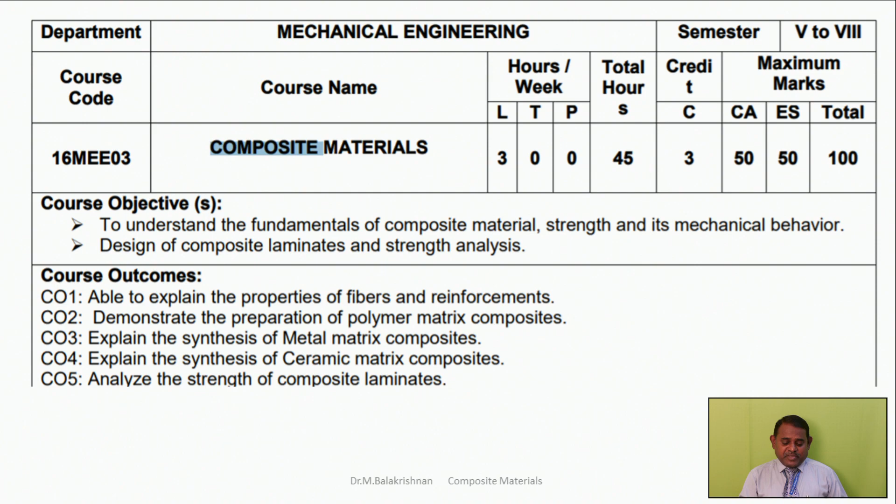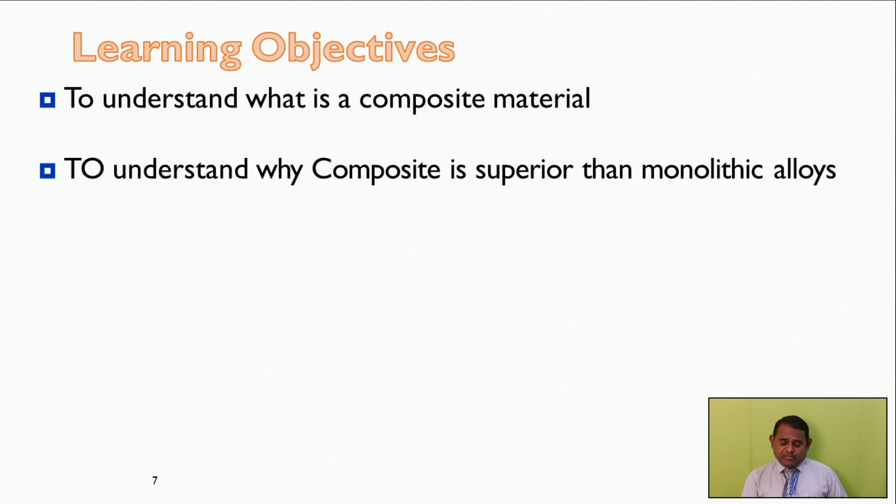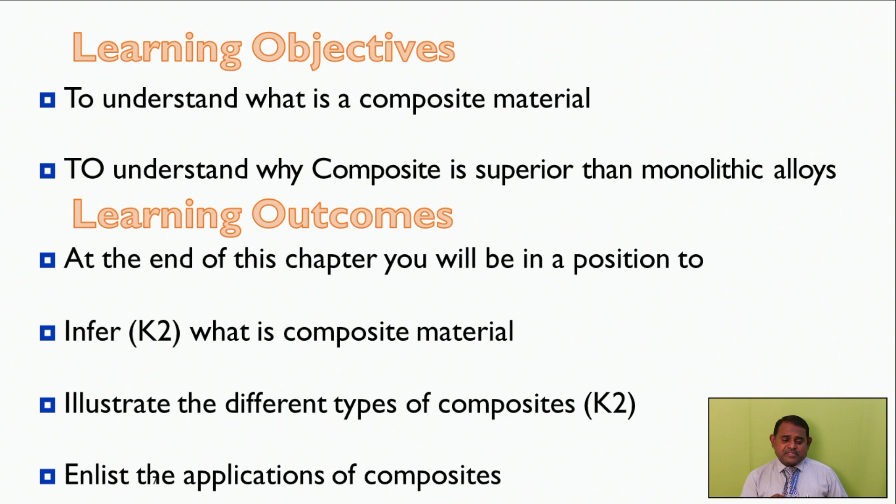Course outcomes related to this subject: you can be in a position to explain the properties of fibers and reinforcement. With this course outcome, we are going to discuss various learning objectives to understand what a composite material is, and why composite is superior to monolithic alloys. At the end of this session, you will be in a position to infer what a composite material is, illustrate the different types of composites, and enlist the various applications of composites.

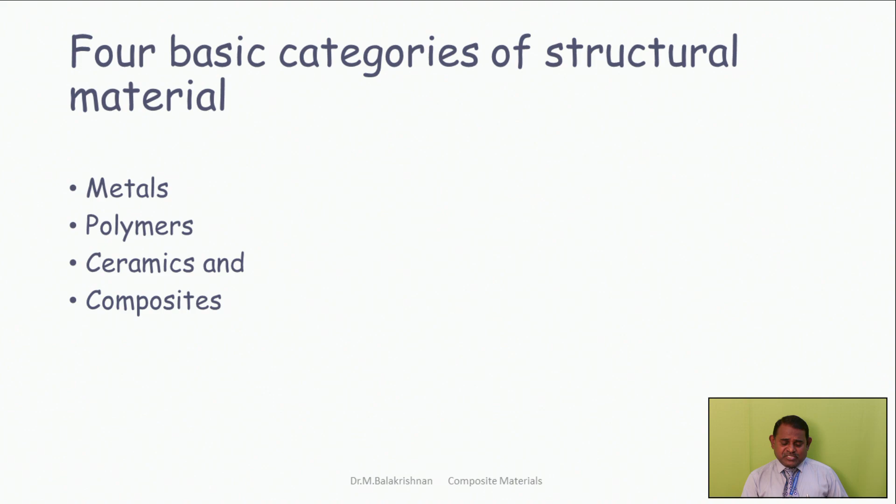You can come across many materials related to metals, polymers, ceramics and composites - these are the common four basic categories of structural material.

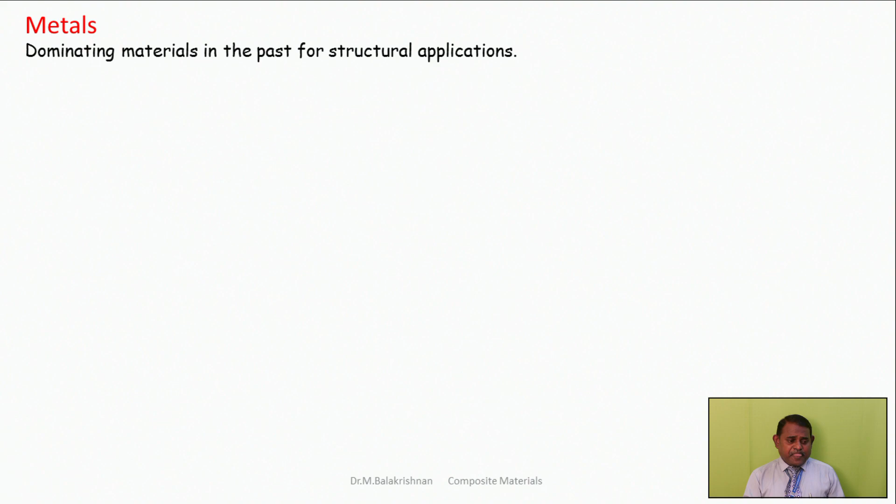Metals are dominating materials for the past centuries because of many advantages, and common materials are aluminum, copper, magnesium, zinc, lead, nickel and titanium. In structural applications, alloys are more frequently used than pure metals because of advantages like high strength, corrosion resistance, wear resistance, and good toughness achieved when added with specific alloying elements. Because of these reasons, alloys are used.

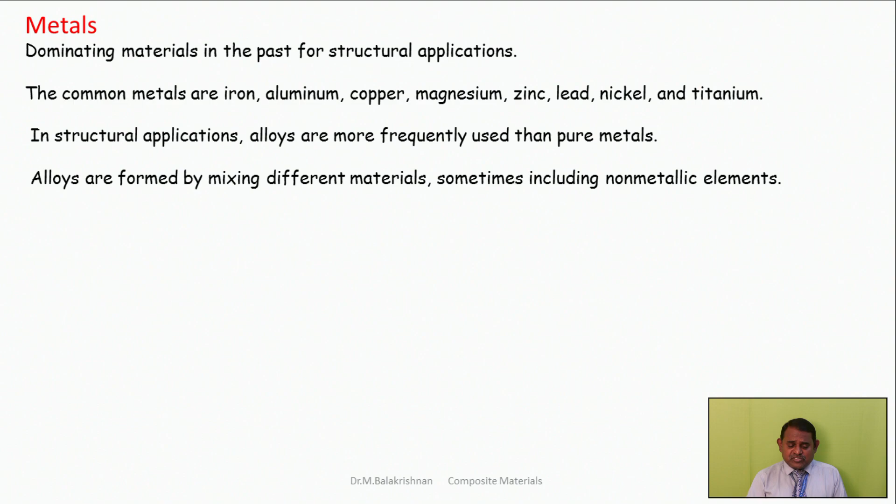Alloys are formed by mixing different materials, sometimes including non-metallic materials too, and they offer better properties than pure metals. For example, cast iron is brittle and easy to corrode, but the addition of less than 1% carbon in iron makes it much tougher, and the addition of chromium makes it very corrosion resistive.

Following the principle of alloying, thousands of metals or alloys are created because of the many possible alloying elements that can be added to metals. Metals are in general heavy compared to plastics and composites.

Only aluminum, magnesium, and beryllium provide densities closer to plastics. But steel is 4 to 7 times heavier than plastic materials, and aluminum is 1.2 to 2 times heavier than plastics. Steel is about 7.8 grams per cc, while aluminum is 2.7 grams per cc, so you can see a clear comparison between aluminum and steel.

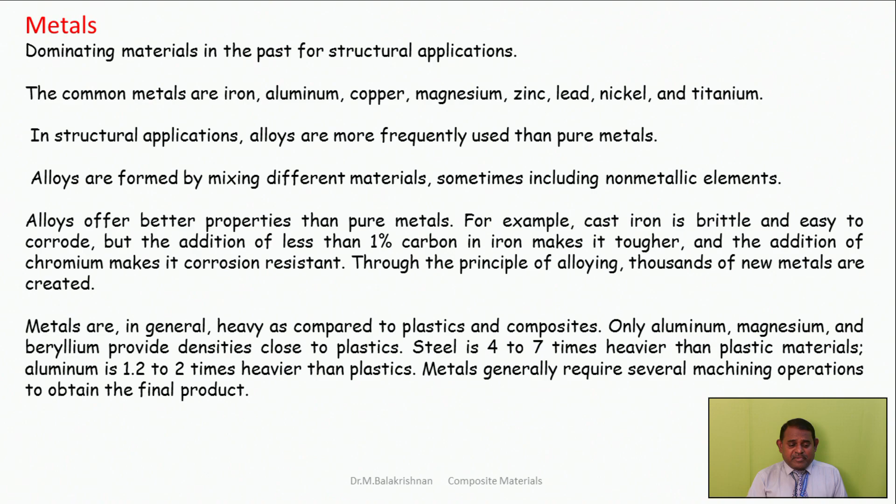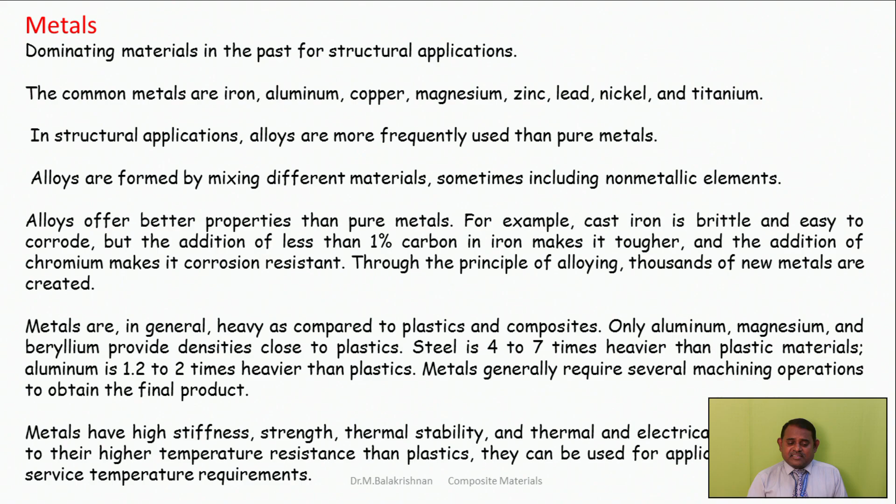Metals generally require several machining operations to obtain the final products. Metals have high stiffness, strength, thermal stability, and thermal and electrical conductivity. Due to their high temperature resistance compared to plastic, they can be used for applications with higher service temperature requirements.

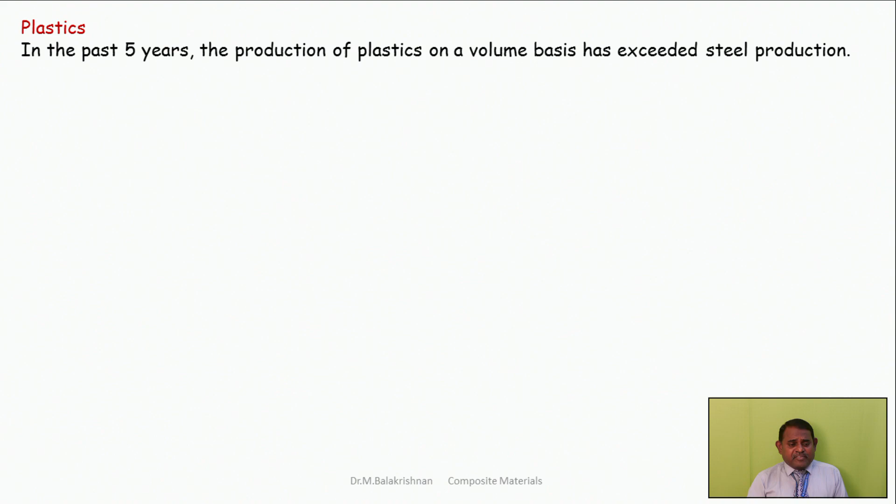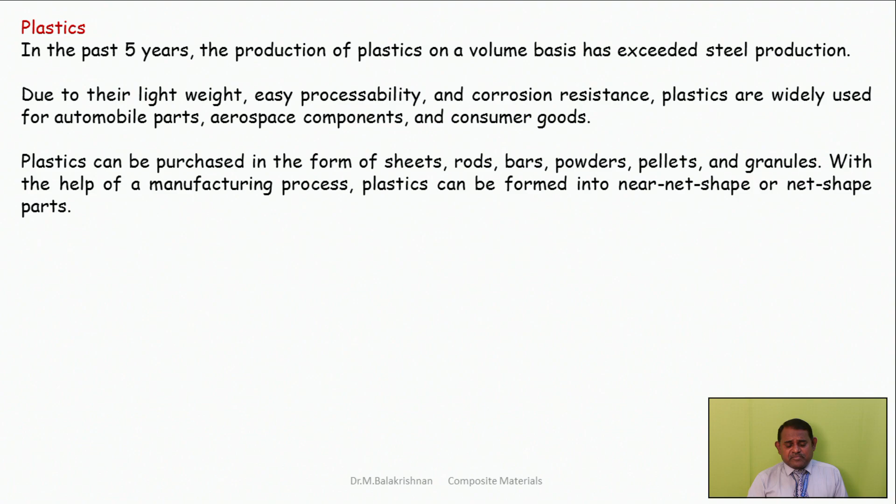Plastics have been picked up over the past 5 to 10 years due to their lightweight, easy processability, and corrosion resistance, and plastics are widely used for automobile parts, aerospace components, and consumer goods. Plastics can be purchased in the forms of sheet, rod, bar, powders, pellets and granules. With the help of manufacturing processes, plastics can be formed into near net shape or net shape parts, providing high surface finish and therefore eliminating several machining operations. This feature enables low cost production.

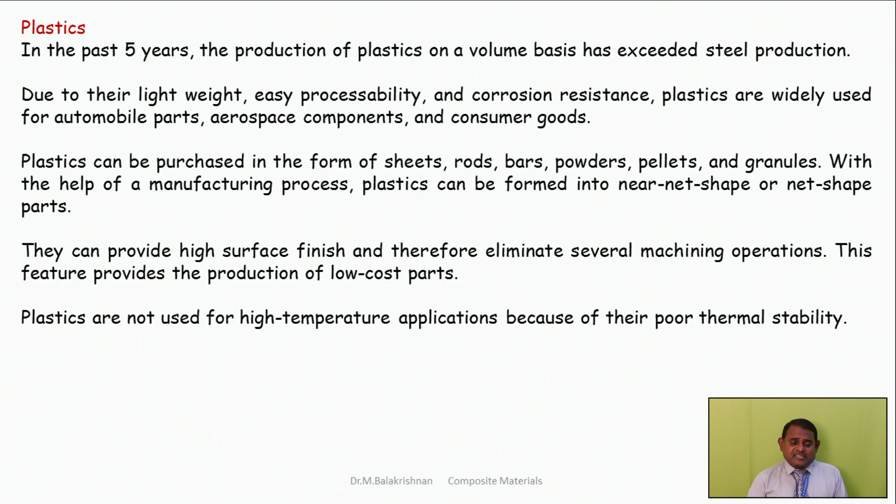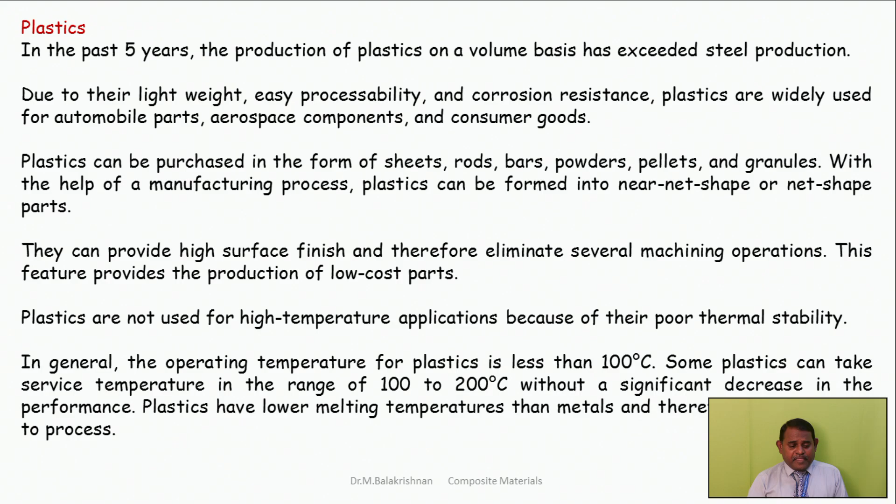Plastics are not used for high temperature applications because of their poor thermal stability - yes, it is very weak. In general, the operating temperature for plastics is less than 100 degrees Celsius, which is another disadvantage. Some plastics can take service temperatures in the range of 100 to 200 degrees Celsius without significant decrease in performance. Plastics have lower melting temperatures than metals, and therefore they are easy to process.

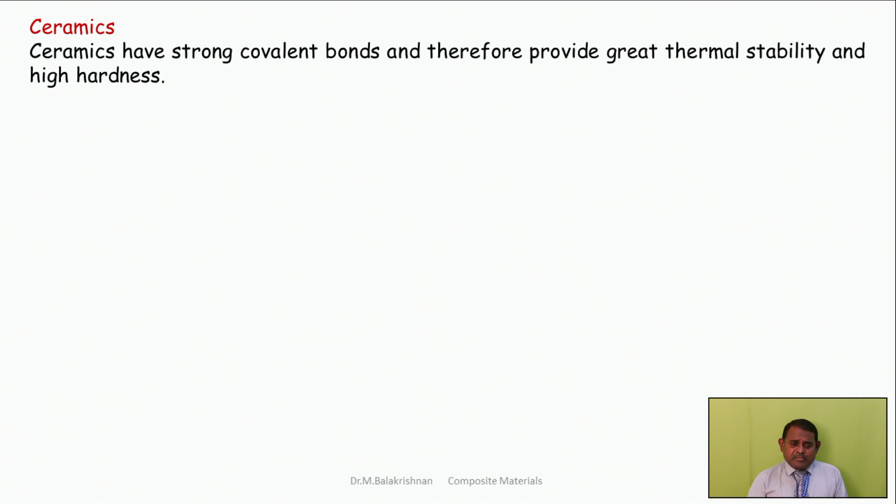The third material category is ceramics, which have strong covalent bonds and therefore provide great thermal stability and high hardness.

Ceramics are the most rigid of all the materials we have discussed, including steel and plastic. The major distinguishing characteristic of ceramics compared to metals is that they possess almost no ductility, because of their high hardness they possess zero or minimum ductility, and they can fail in brittle fashion.

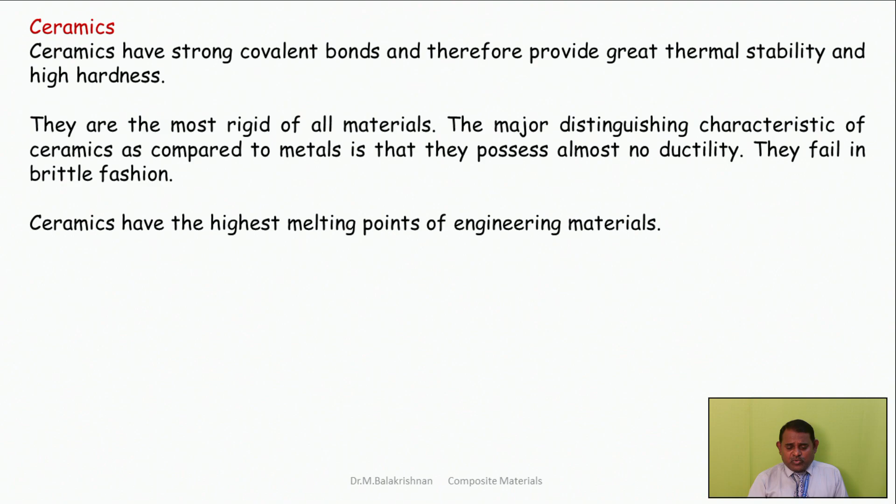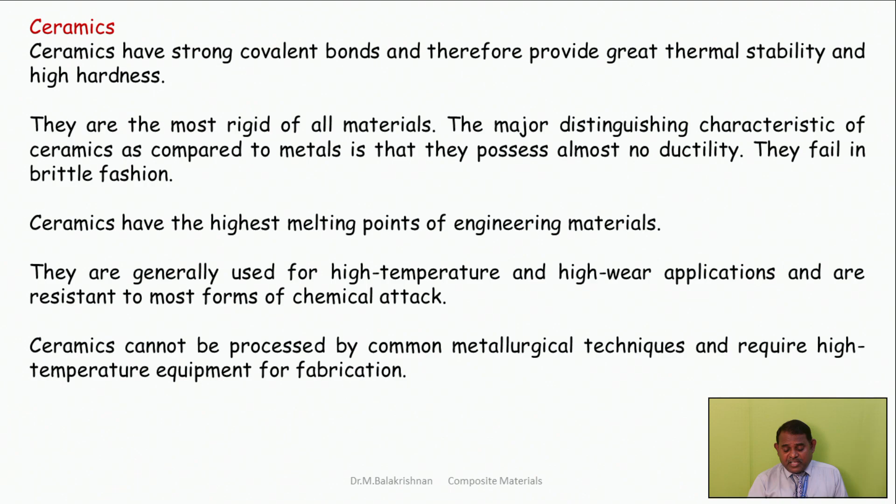Ceramics cannot be processed by common metallurgical techniques and require high temperature equipment for fabrication. Due to their high hardness, ceramics are difficult to machine and therefore require net shape forming for final shape production. They also require expensive cutting tools such as carbide or diamond tools.

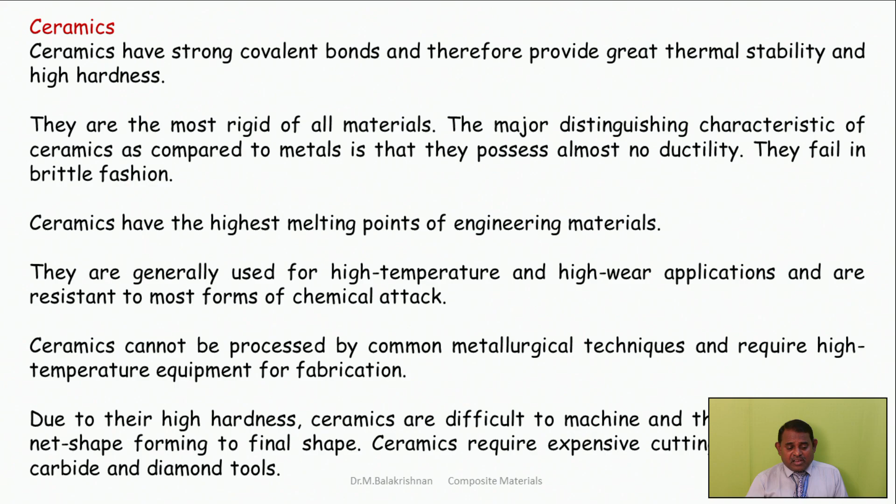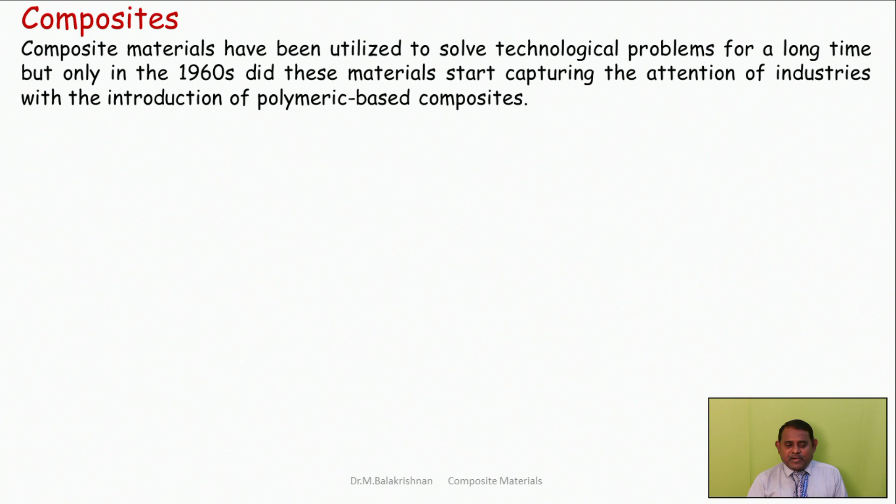The fourth category of material is composites. Composite materials have been utilized to solve technological problems for a long time, but only in the 1960s did these materials start capturing attention in industries with the introduction of polymeric based composites. Since then, composite materials have become common engineering materials, designed and manufactured for various applications including automotive components, sporting goods, aerospace parts, consumer goods, and the marine and oil industries.

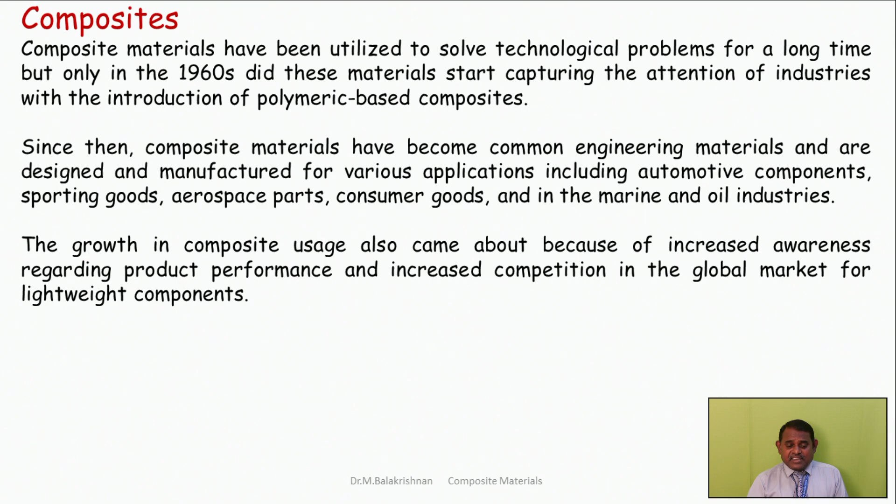The growth in composite usage also came about because of increased awareness regarding product performance and increased competition in the global market for lightweight components.

Among all materials, composites have the potential to replace widely used steel and aluminium, many times with better performance. Replacing steel components with composite components can save 60 to 80% of the component weight, and 20 to 50% of the weight by replacing aluminium parts. Today it appears that composites are the material of choice for many engineering applications.

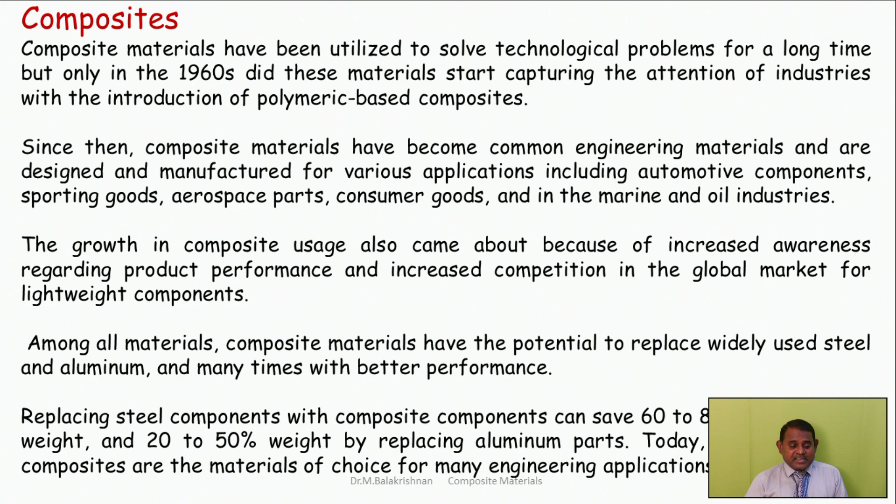As discussed previously, the density of steel is around 7.8 grams per cc, while the density of composites can start lower, for example aluminum composite can be comparable with 2.4 grams per cc, and it can increase with the addition of the fraction of reinforcements.

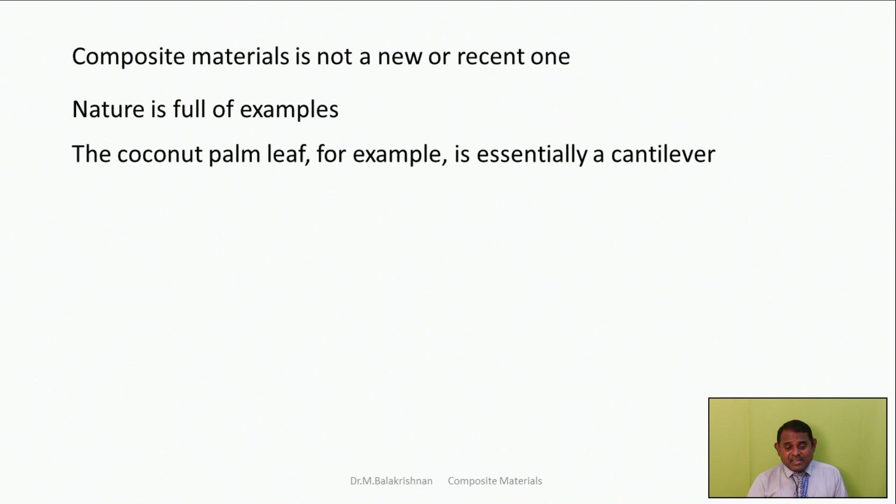Composite material is not new or recent, because nature is full of examples of composites. For example, the coconut palm leaf is essentially a cantilever beam, and it is a fibrous composite, with cellulose fiber in a lignin matrix. The cellulose fibers have high tensile strength but are very flexible, that is low stiffness, while the lignin matrix joins the fibers and furnishes the stiffness. So the combined properties are obtainable by using the combined effect of the cellulose and lignin matrix.

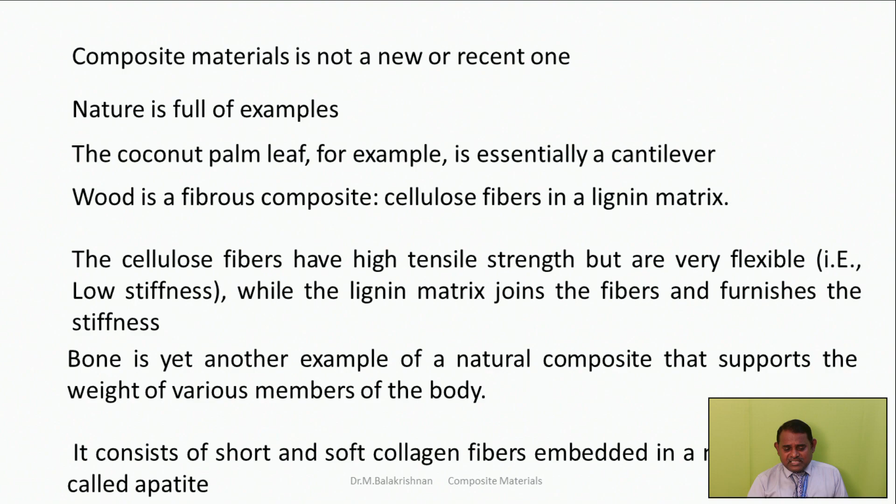Bone is another example of a natural composite that supports the weight of various members of the body. It consists of short and soft collagen fibers embedded in a mineral matrix called apatite.

Nevertheless, one can safely mark the origin of the distinct discipline of composite materials as the beginning of the 1960s. As discussed previously, composites are not new, and may have existed since the evolution of the earth, but the application of composite materials to the engineering industry started picking up from the 1960s.

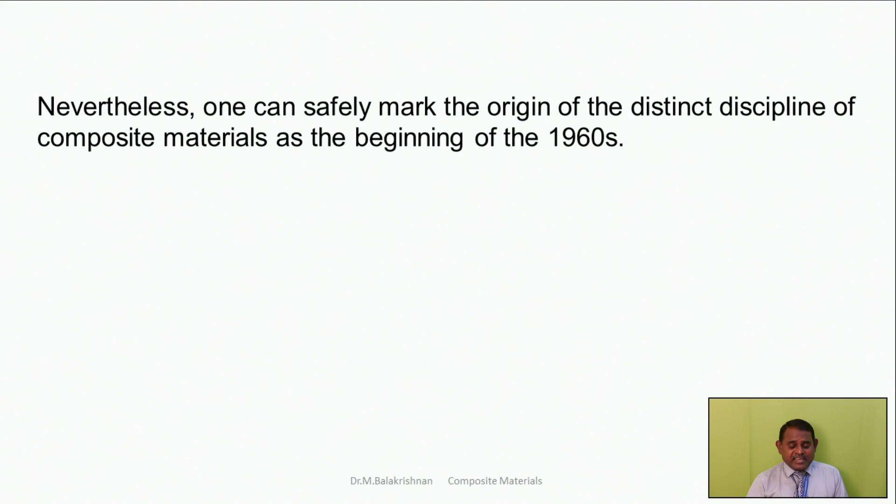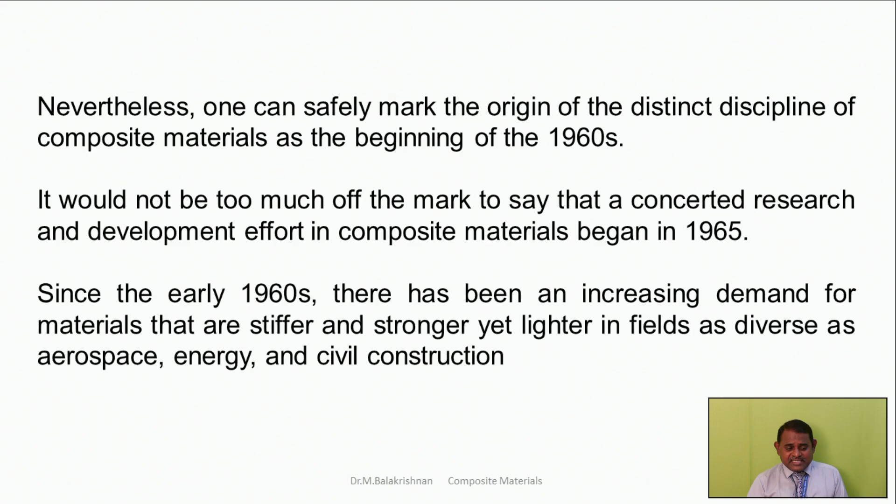That is why it is claimed that composite science and its application started from the 1960s, and it would not be too much to say that concerted research and development effort in composite materials began in 1965. Since the early 1960s, there has been increasing demand for materials that are stiffer and stronger, yet lighter, in fields as diverse as aerospace, energy, and civil construction.

As you know from the materials perspective, we have more than 50,000 engineering materials. Maybe some may not find a real application yet, but if you take into consideration the full list of engineering materials, it can cross more than 50,000.

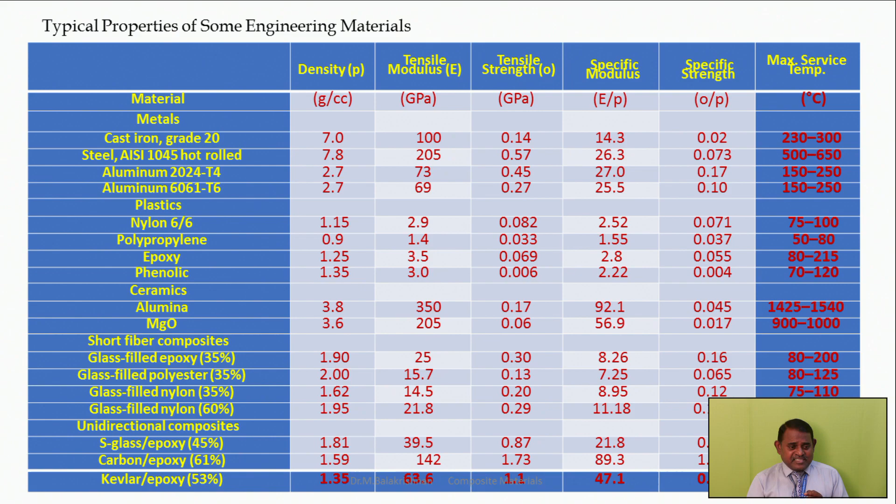Now, what is composite? We have been discussing various material categories, starting from metal, plastics, ceramics and composite. So what is a composite specifically? It consists of two or more physically distinct phases, that is matrix and reinforcement, with an interface separating them.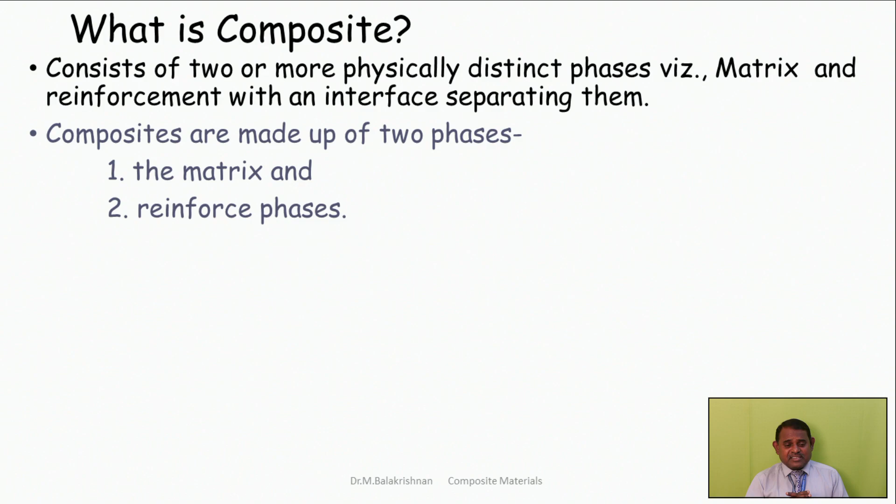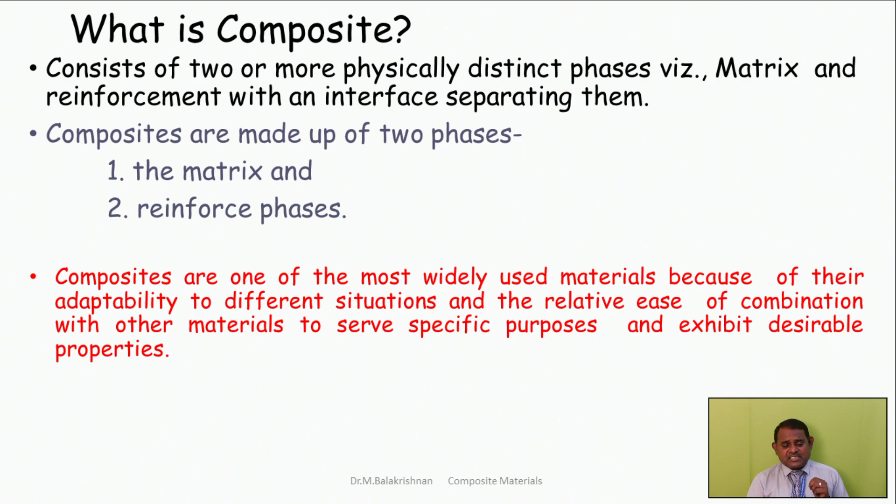Composites are made up of two phases, the matrix and reinforcement phase, and there will be a separating phase called the interface. Composites are one of the most widely used materials because of their adaptability to different situations and the relative ease of combination with other materials to serve specific purposes and exhibit desirable properties.

The main advantage of composite materials is their high strength and stiffness combined with low density when compared with bulk materials. So we should think about the density and specific strength. The strength-to-weight ratio and stiffness-to-weight ratio plays a vital role when we choose a material for high mobility, for example automobile applications, which require high strength with light weight.

So in this case, composite material will be a suitable solution for giving a perfect combination of high strength and light weight. For example, if you look for high strength of about 750 megapascal, then you should go with steel and its alloys only. But another material can solve this problem, because if you look at steel, you should think about its density, which crosses about 7.8 grams per cc.

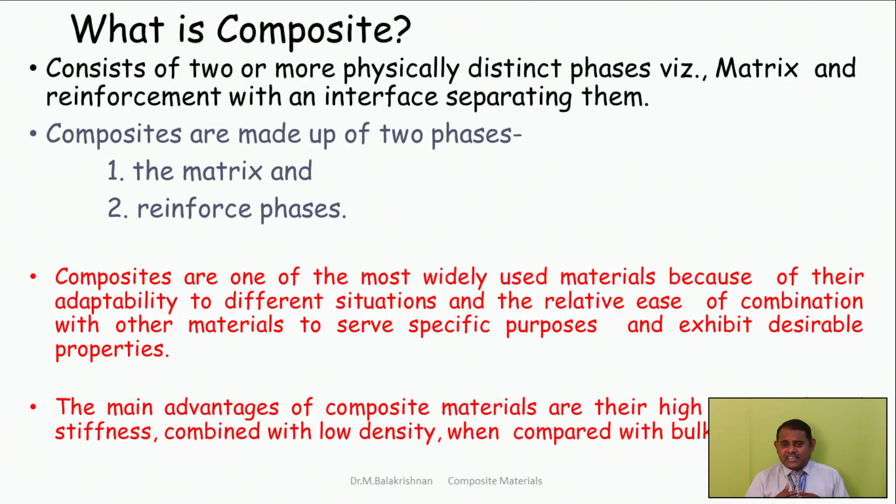But the same strength can be easily achievable by the application of composite materials, like aluminum alloy composite, when it is added with silicon carbide particles. It can give 650 to 700 megapascal strength for pure aluminum alloy even, giving one-third of the density and weight while still achieving high strength. That is the beauty of selecting composite materials.

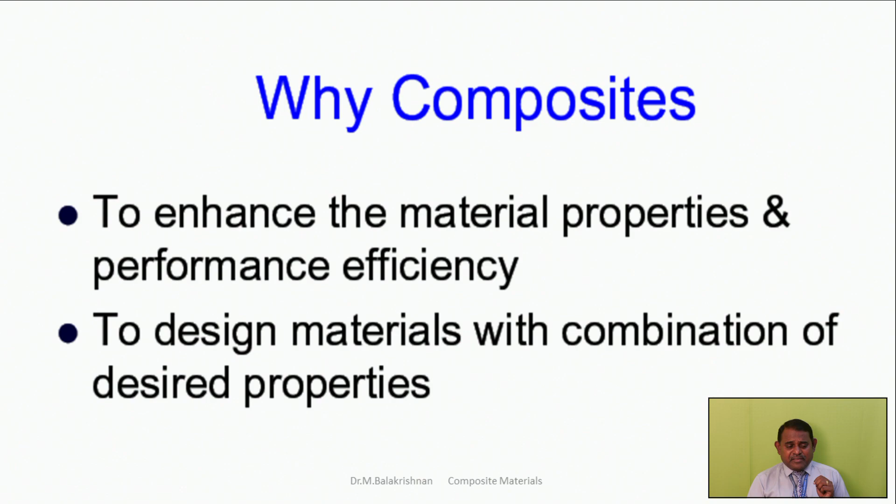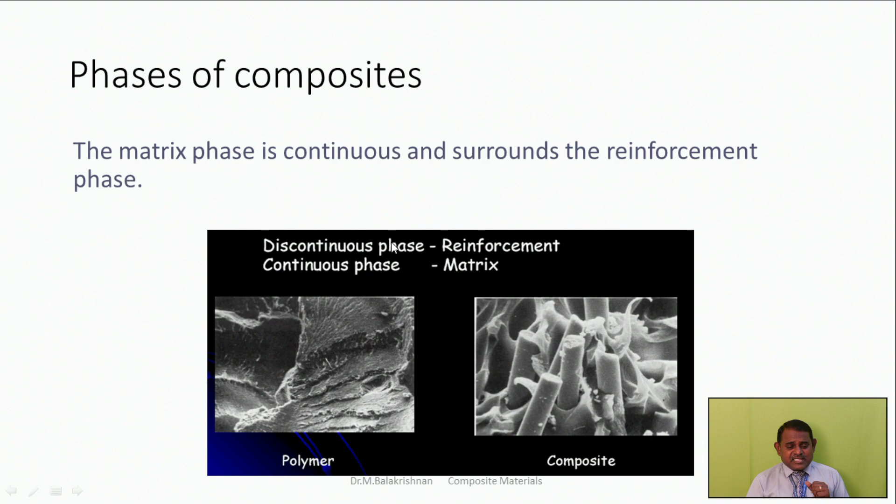To enhance material properties, performance efficiency is the primary reason why people are really inclined towards composite manufacturing, as it gives a chance to design materials with a combination of desired properties. In the phases of a composite, the matrix phase is a continuous phase which surrounds the reinforcement phase. From this diagram, we can understand that the discontinuous phase is the reinforcement, and the continuous phase is the matrix.

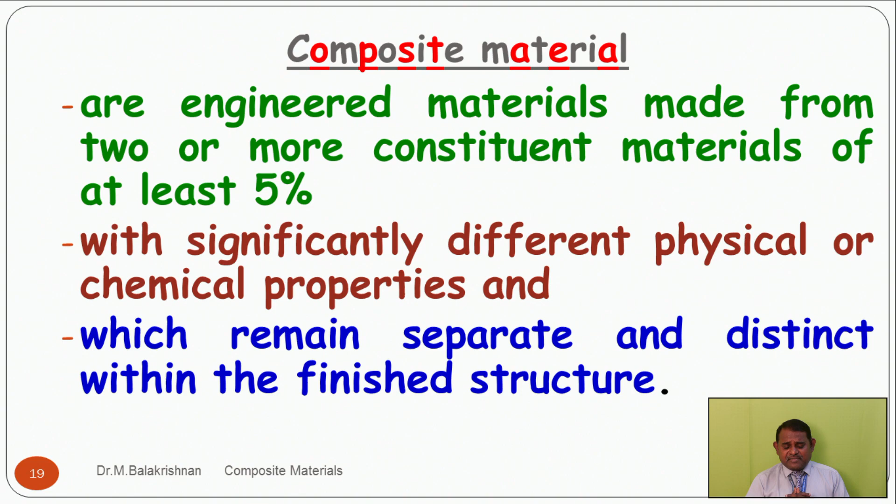Composites are engineered materials made from 2 or more constituent materials, each at least 5%, with significantly different physical or chemical properties. It's very important to understand that the 2 phases we discussed are the reinforcement and matrix phase. Both of these materials have different physical and chemical properties and remain separate and distinct within the finished structure.

In this context, we should also think about alloys. Alloys are made with 2 or more different constituent elements, and similarly composites are also made with 2 or more different elements. So what is the difference between composite and alloy? An alloy is made as a homogeneous mixture, that is, alloys are available in solid solutions or other ways in precipitates, but composites remain separate even when they are made.

For example, the reinforcement phase will be reinforcement phase and the matrix phase will be matrix phase. You can easily distinguish which is matrix and which is reinforcement after manufacturing of the composite, even through the naked eye. For example, in bamboo leaf or bone, which we talked about earlier, and banana leaf or other composite materials, you can distinguish what is reinforcement and what is matrix. But in alloys, it is not possible to distinguish with the naked eye or even under a microscope which is a solvent atom and which is a solute atom.

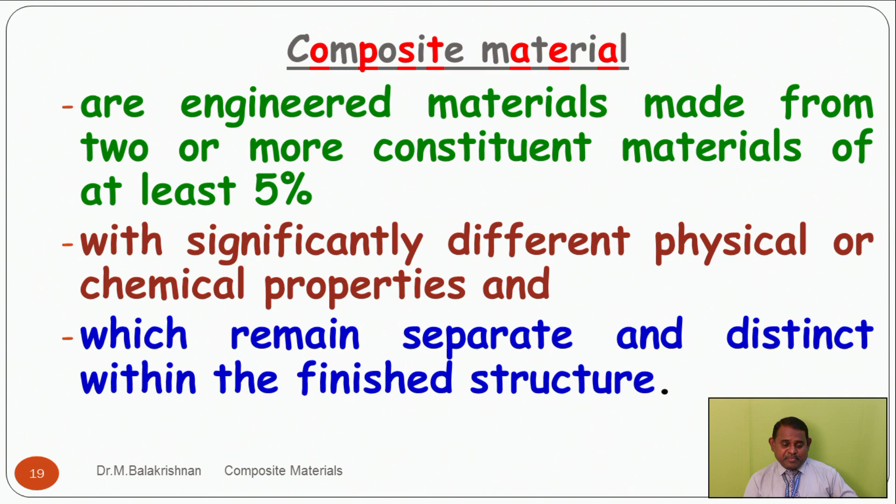So what is an alloying element? It is not possible to distinguish after the making of an alloy. So that is the difference between alloy and composite. In composite, the reinforcement phase and matrix phase remain separate and distinct within the finished structure. But in alloys, it does not remain separate, it is mixed as a solid solution or precipitate.

Why are composites important? Because composites can be very strong, very stiff, and very light in weight. So strength-to-weight ratio and stiffness-to-weight ratio that are easily achievable can be greater than steel or aluminum. The same stiffness can be achieved with lightweight - that is the beauty of composites.

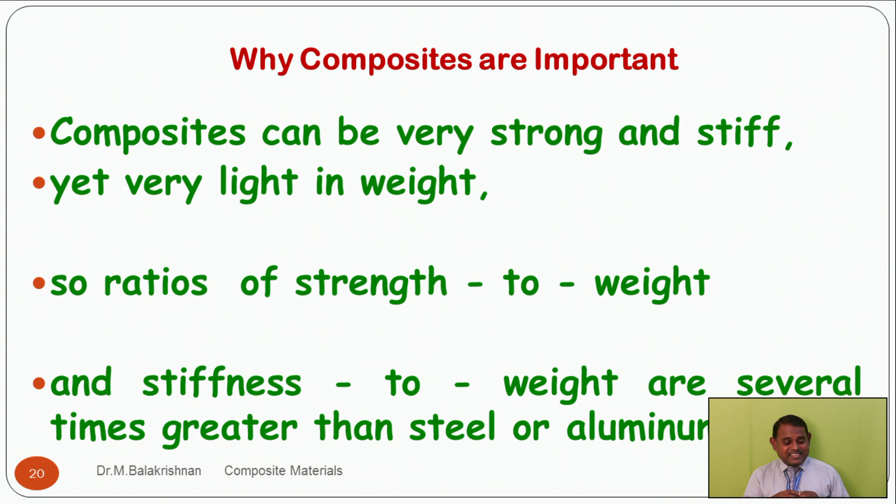In addition, fatigue properties are generally better than common engineering metals, which is another advantage of composites, and toughness is often greater too. Composites can be designed so they do not corrode like steel. If you want to make steel a non-corrosive material, you should add costly alloying elements like chromium or nickel to make the steel stainless. But in composite, this can be easily achieved without much addition of alloying elements.

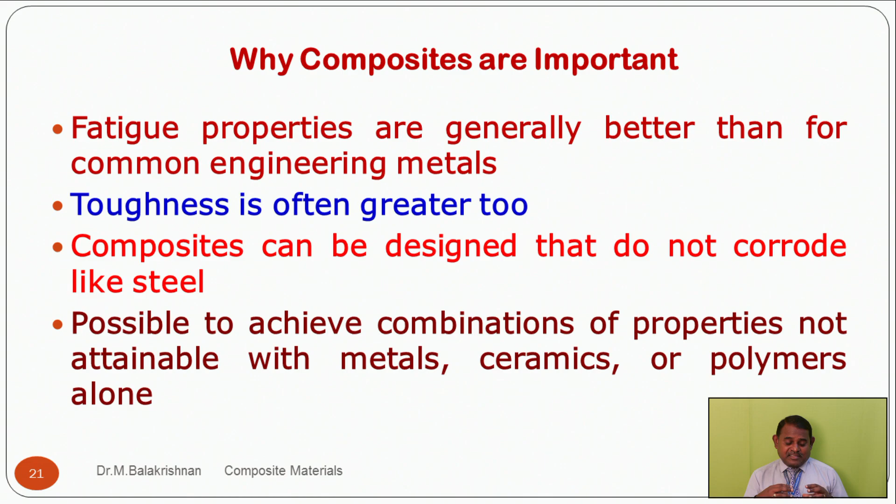It is possible to achieve a combination of properties that cannot be achieved in metals, ceramics, or polymers alone. When used alone, it is not possible to achieve this kind of combination of properties, but when combined with a matrix to form a composite material, it becomes possible to achieve this combination of properties.

But you cannot claim that composites always have an advantage and huge potential for large applications - it's not like that. Composites also have some disadvantages. Properties of many important composites are anisotropic - this is a point to seriously think about. It offers different properties with respect to different loading directions, so you have to think very carefully when choosing a composite material for your application.

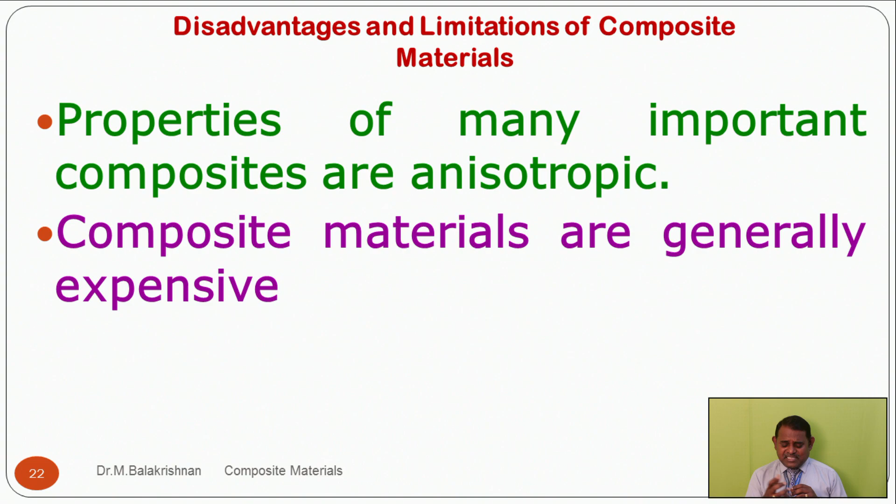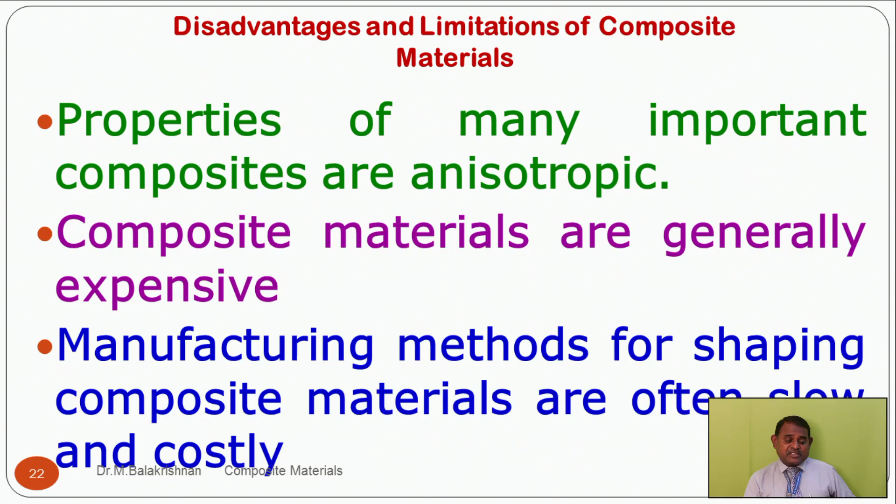And composites are generally expensive, whether in the way of matrix selection or reinforcement selection. Again, the third important disadvantage of composite material is that manufacturing methods for shaping composite materials are often slow, and it is costly.

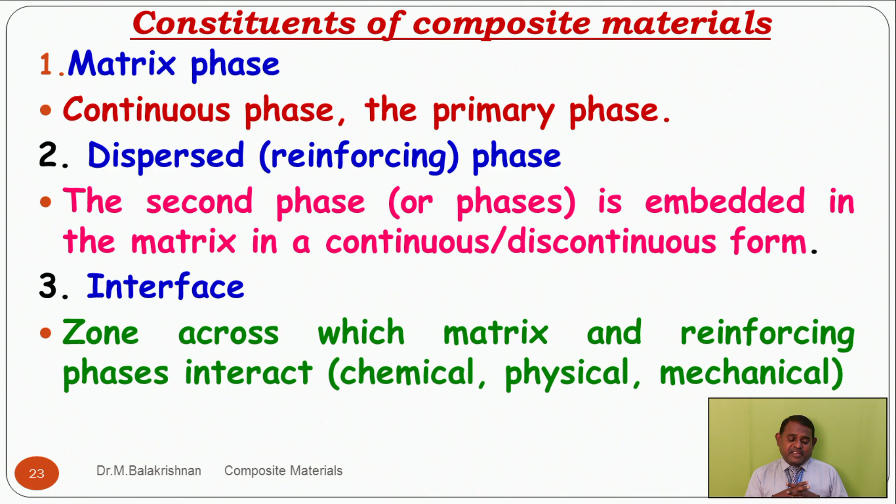Coming to the constituents of composite material, as we discussed in the previous slides, the matrix phase is a continuous phase and it is the primary phase. The dispersed or reinforcement phase is called the secondary phase, and it is embedded in the matrix in a continuous or discontinuous form. The third one is the interface - it is the zone across which the matrix and reinforcement phase interact chemically, physically, and mechanically.

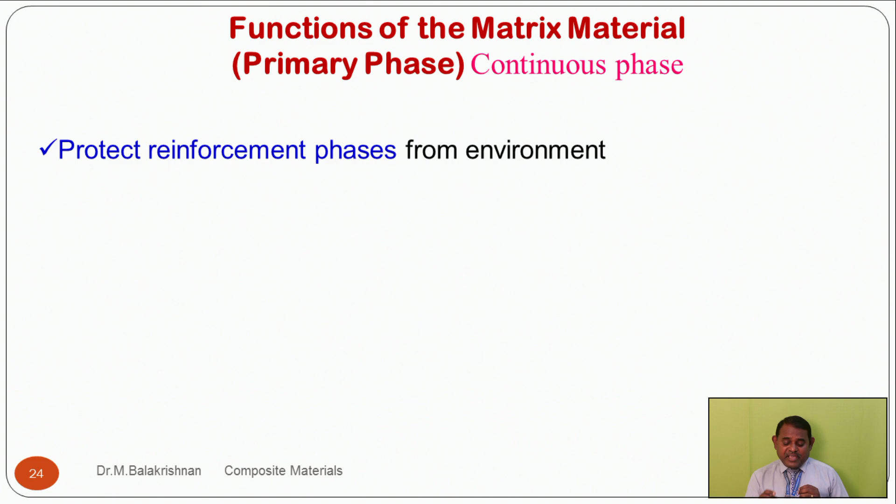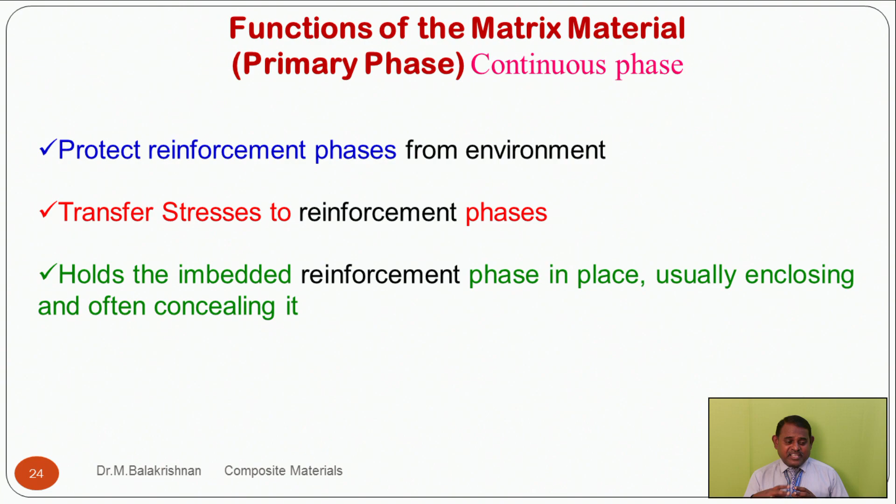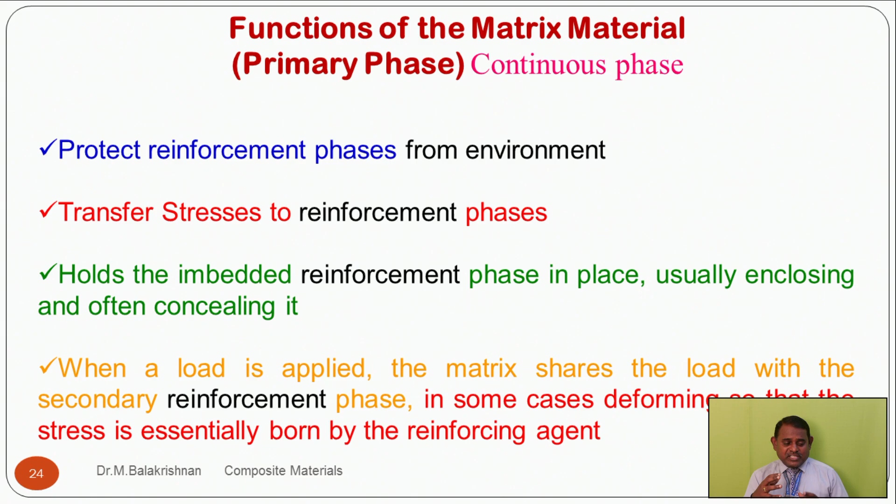So functions of the matrix material, primary phase or continuous phase: it protects the environment, it protects the reinforcement phase from the environment, and it transfers the stresses to the reinforcement phase, and it holds the embedded reinforcement phase in place, usually enclosing and often concealing it. When a load is applied, the matrix shares the load with the secondary reinforcement phase. In some cases, it deforms so that the stress is essentially borne by the reinforcement agent.

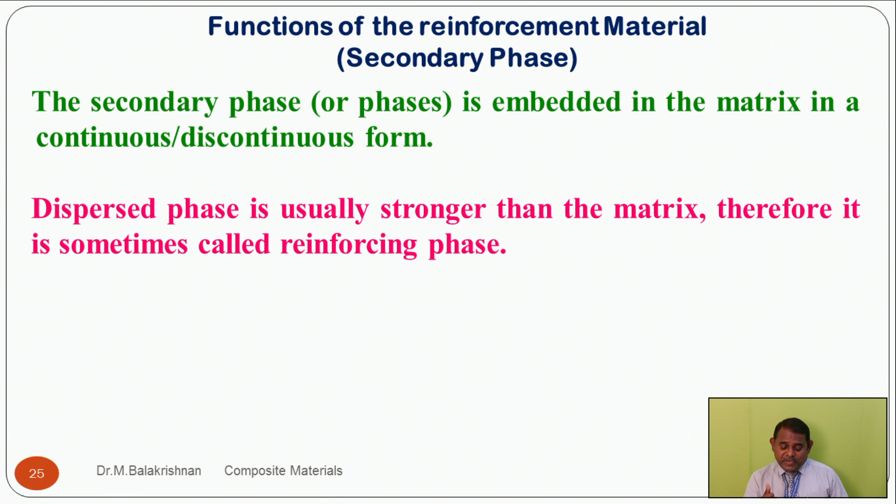Functions of the secondary phase, that is reinforcement: the secondary phase is embedded in the matrix, in the primary phase, and may be continuous or discontinuous, depending upon the type of reinforcement we select. The dispersed phase is usually stronger than the matrix, therefore it is called the reinforcement phase. The reinforcement imparts special physical, mechanical, and electrical properties to enhance the matrix properties, and the material properties are a combination of these two.

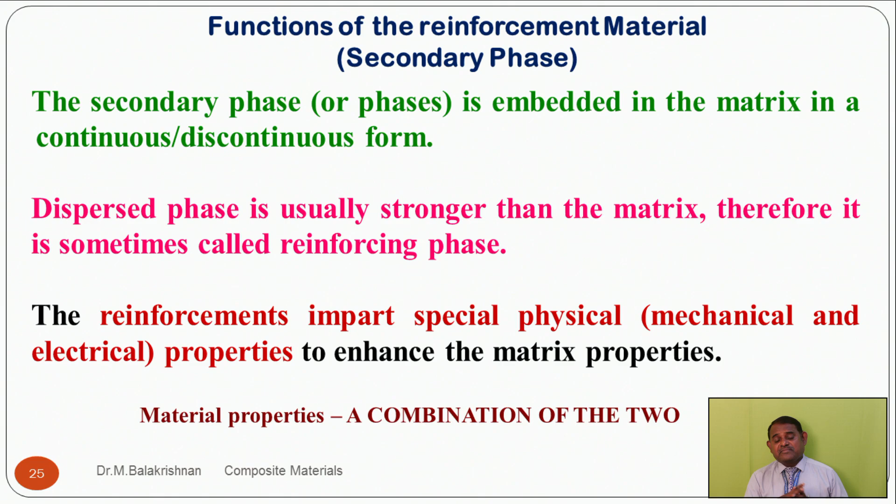So as we discussed, the primary phase is the matrix phase. The matrix phase is normally of lesser strength than the reinforcement phase. And the reinforcement phase is again stronger than the matrix phase. Then what will be the property of the composite material? The material property of the composite is a combination of these two.

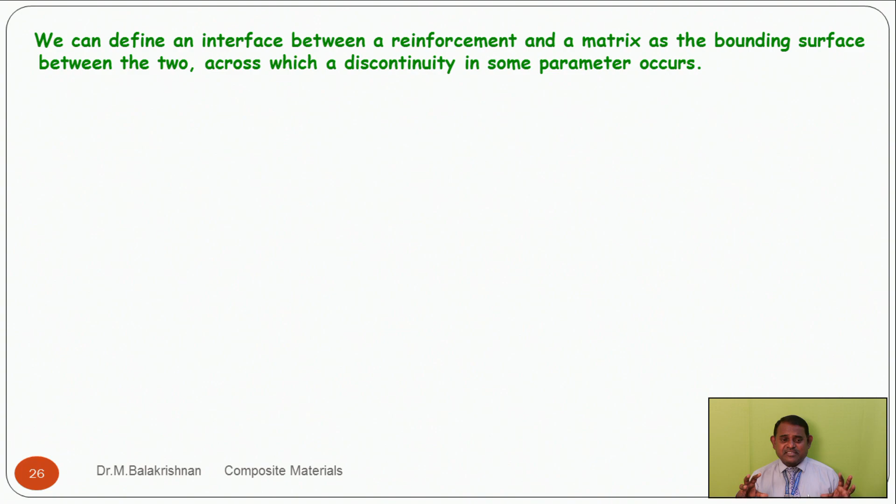We can define an interface between the reinforcement and the matrix as a bounding surface between the two, across which discontinuity in some parameters occurs. We have a matrix and a reinforcement, and in between there is a phase called the interface. This discontinuity across the interface may be sharp or gradual. Mathematically, the interface is a bidimensional region because it has both length and breadth, but thickness can be eliminated because it is very small in dimension. In practice, we have an interfacial region with finite thickness, so the thickness also has to be considered.

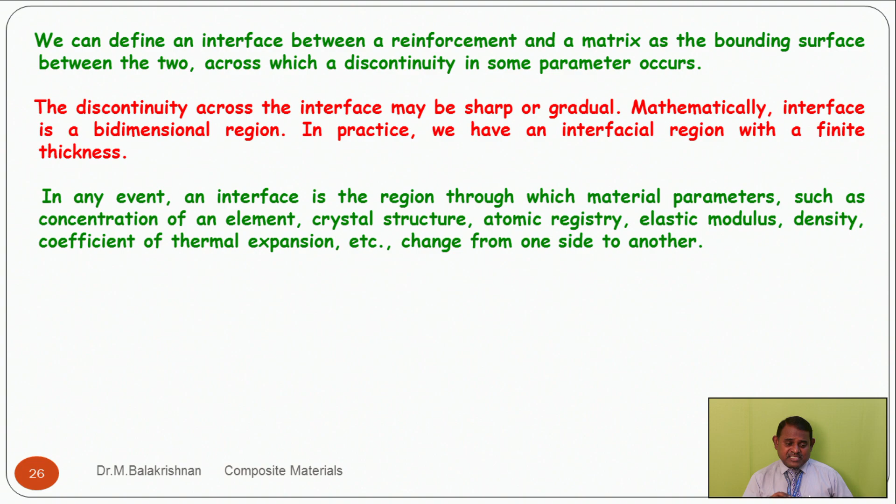In any event, an interface is the region through which material parameters such as concentration of an element, crystal structure, atomic registry, elastic modulus, density, coefficient of thermal expansion, etc. can change from one side to the other. So clearly, a given interface may involve one or more of these items.

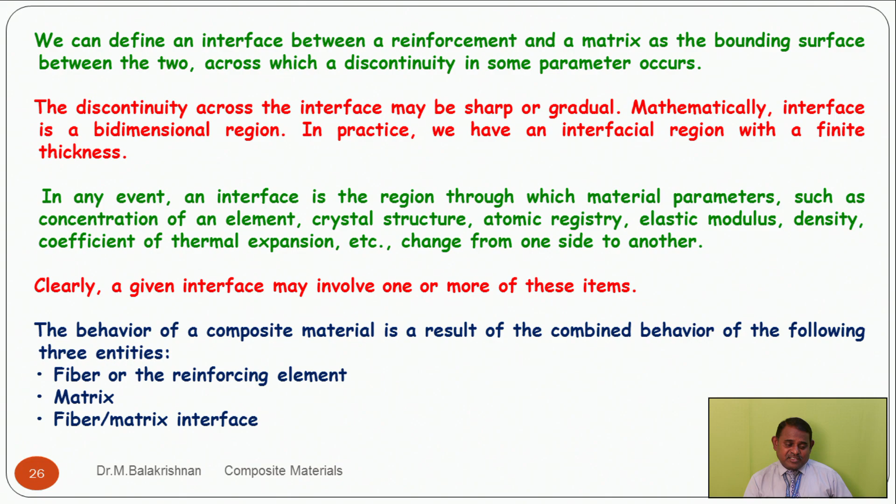The behavior of a composite material is a result of the combined behavior of the following three entities: the fiber or reinforcement element, the matrix, and the fiber-matrix interface. These three elements only decide the final property of the composite material.

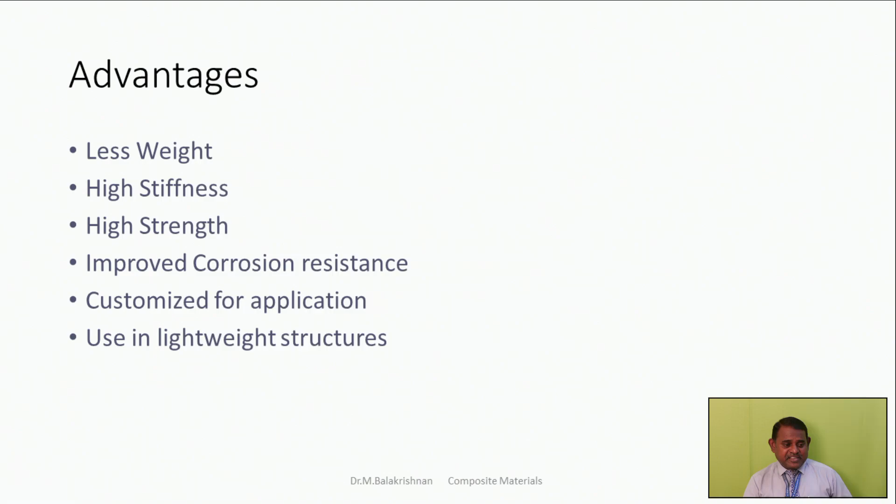And the advantages: naturally it offers less weight, high stiffness, high strength, improved corrosion resistance, customized for application, and use in lightweight structures are the key benefits of composite material.

Today's applications include boat hulls, sport equipment, rackets, skis, and many automotive components. I cannot enlist everything here, because starting from automobile bodies and moving to engine components like pistons, gudgeon pins, and crankcase, everything nowadays is being changed from existing materials like cast iron and aluminum to various combinations of composite materials.

And it finds very good applications in biomedical products, artificial limbs, artificial implants, tissue engineering, and underground pipes. Nowadays all the pipes are not made with cemented pipes; it is easier to transport if the pipe is made with composite materials. And aircraft, aerospace structures, marine components, and various automobile parts are now applied with composite materials.

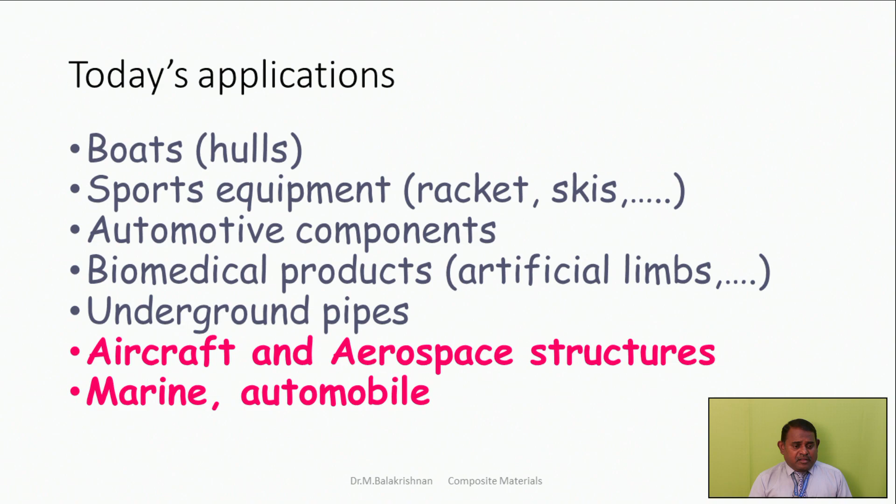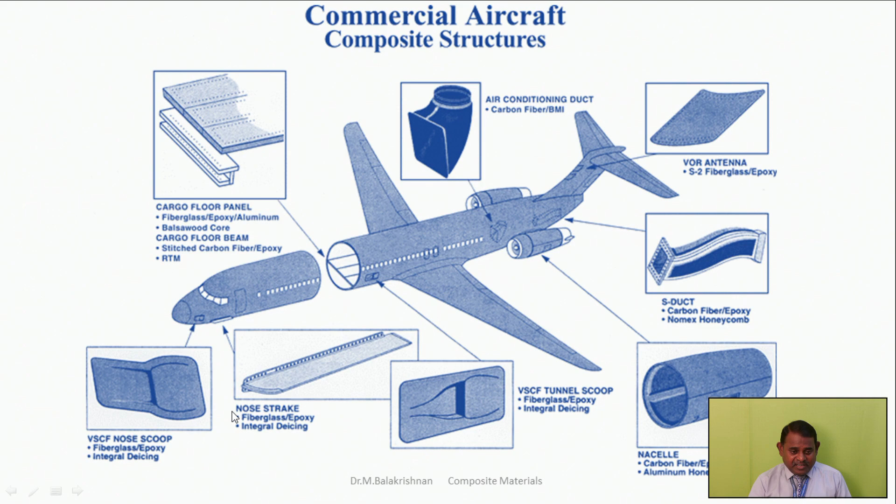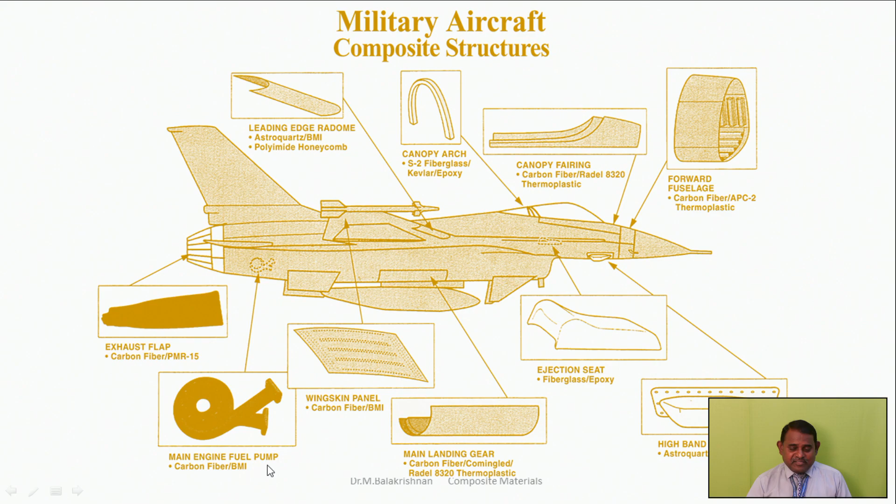And for military aircraft components, you see here the leading edge radome and canopy arch, then canopy fairings, forward fuselage, ejection seat, high band radome, main landing gears, wing skin panel, and main engine fuel pump. Everything is made with composite structure nowadays.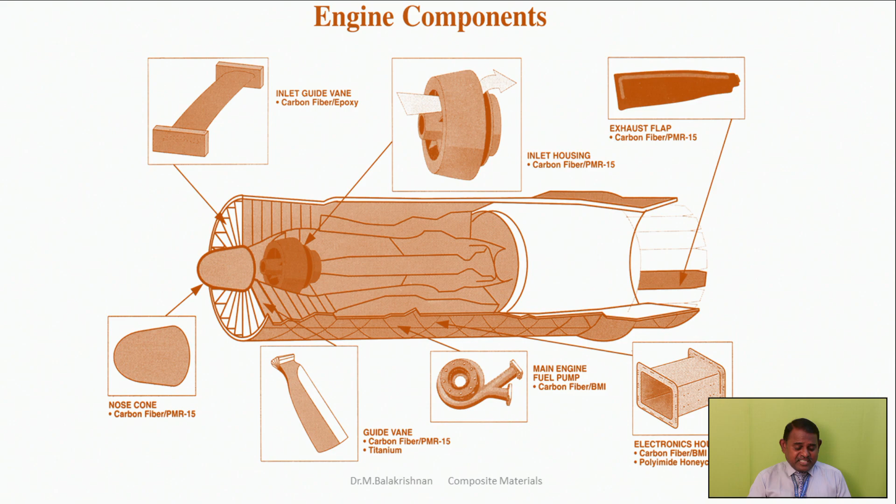High temperature applications even nowadays are replaced by existing materials through the application of various composite structures. You can also see applications related to satellite components: carbon fiber tubing, shear panels, brackets, fittings, integrally stiffened bus panels, and feed horn antennas. Many locations, 3 plus 3, 6 different locations, are being highlighted in this picture.

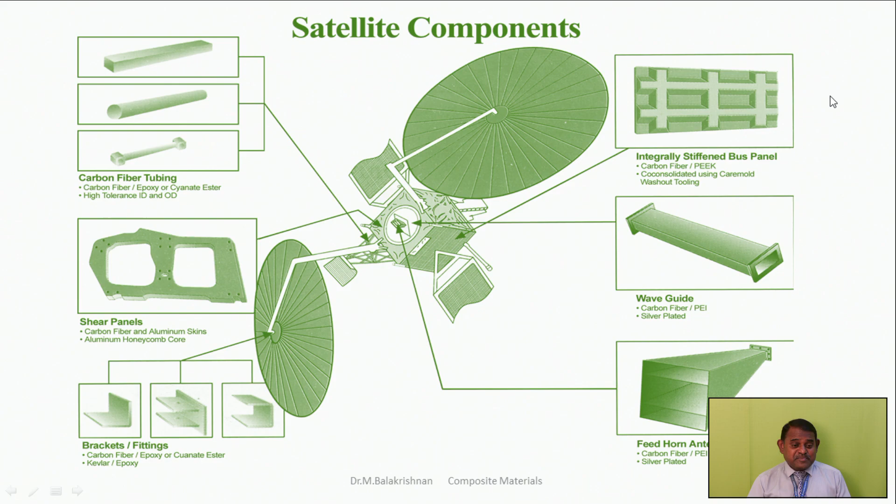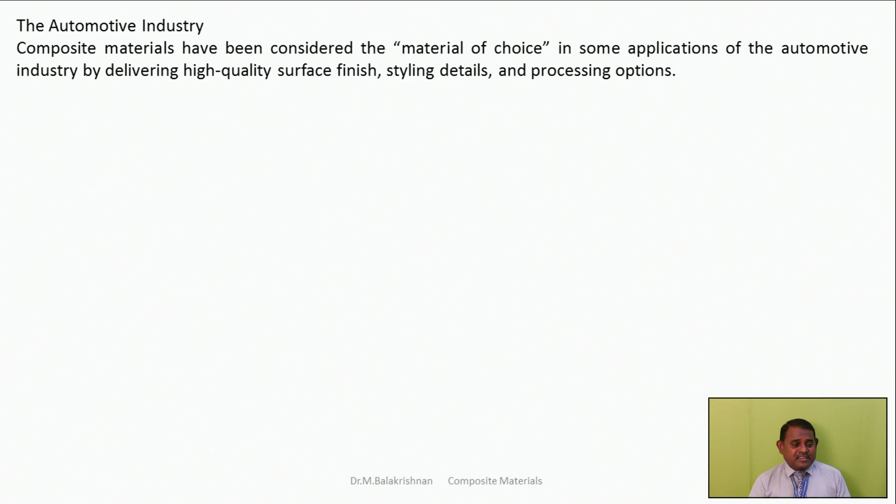In the automotive industry, composite materials have been considered the material of choice in some applications by delivering high quality surface finish, styling details, and processing options. Manufacturers are able to meet automotive requirements of cost, appearance, and performance utilizing composites. Today, composite body panels have a successful track record in all categories, from exotic sports cars to passenger cars to small, medium and heavy truck applications.

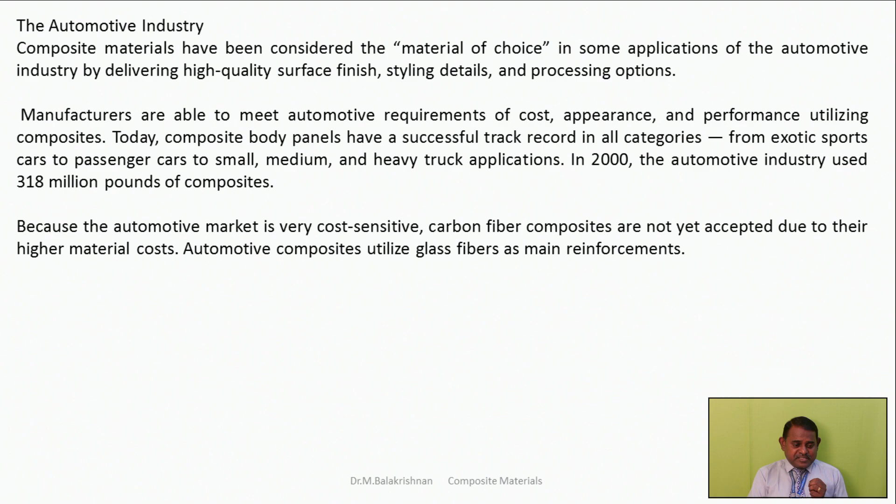In 2000, the automotive industry used 318 million pounds of composite materials. Because the automotive market is very cost sensitive, carbon fiber composites are not yet widely accepted due to their high material cost, but automotive composites utilize glass fibers as the main reinforcement. The average use of composites in automobiles per year since 1988 and 1993 includes bumper beams, seats, load floors, hoods, radiator supports, roof panels, and other areas.

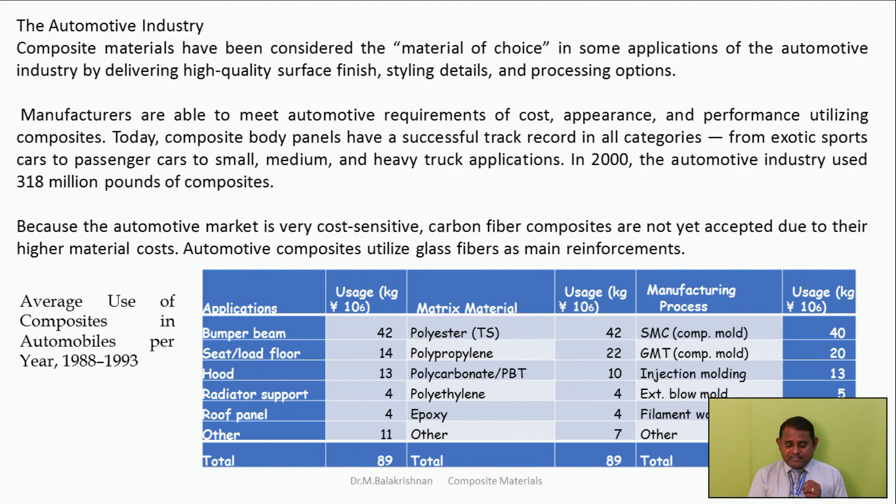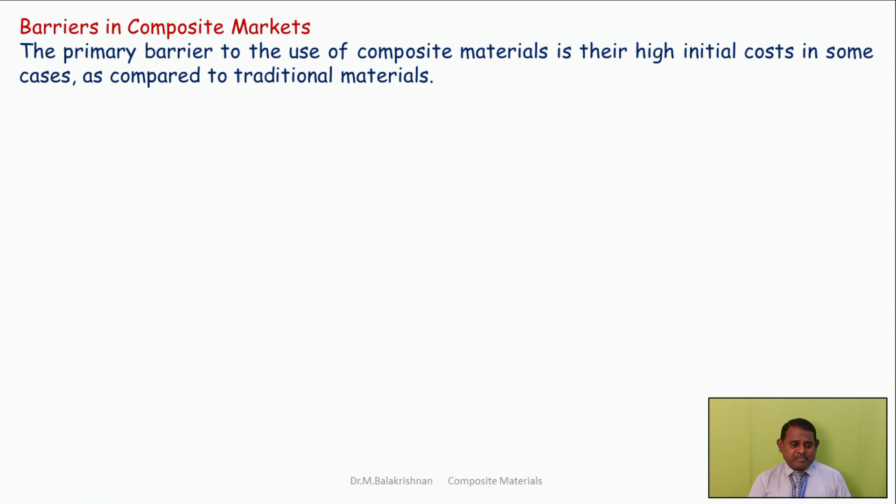Regarding barriers in composite markets, yes, composites have many advantages and disadvantages. So what is still making a barrier? A design engineer cannot always choose a composite material as a candidate material for his specific design. The primary barrier to the usage of composite material is their higher initial cost in some cases compared to traditional materials. Regardless of how effective the material will be over its life cycle, industry considers the high upfront cost.

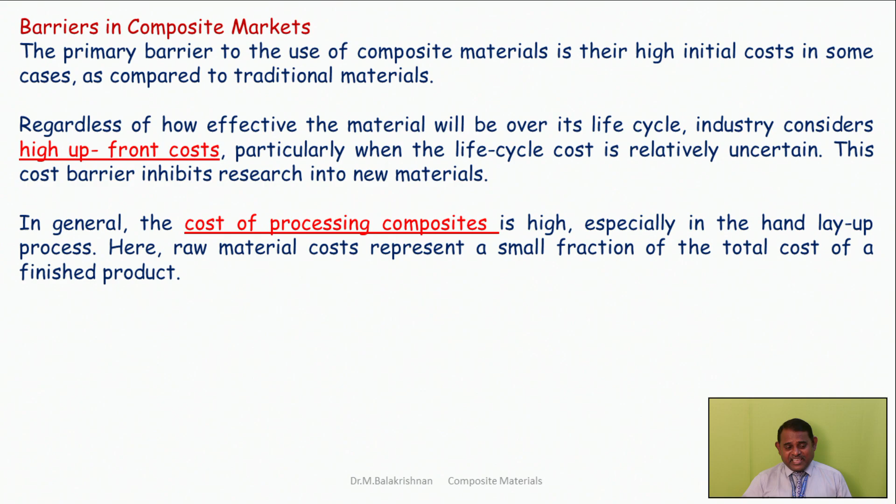Yes, the composite material is also like a fluctuating market. Because of that reason, the production of composite material may also go up and down. In general, the processing cost of composites is high, especially in hand layup processes. Here, raw material cost represents a small fraction of the total cost of the finished product. There is already evidence of work moving to Asia, Mexico and Korea for these cases, where labor costs are a significant portion of the total product cost.

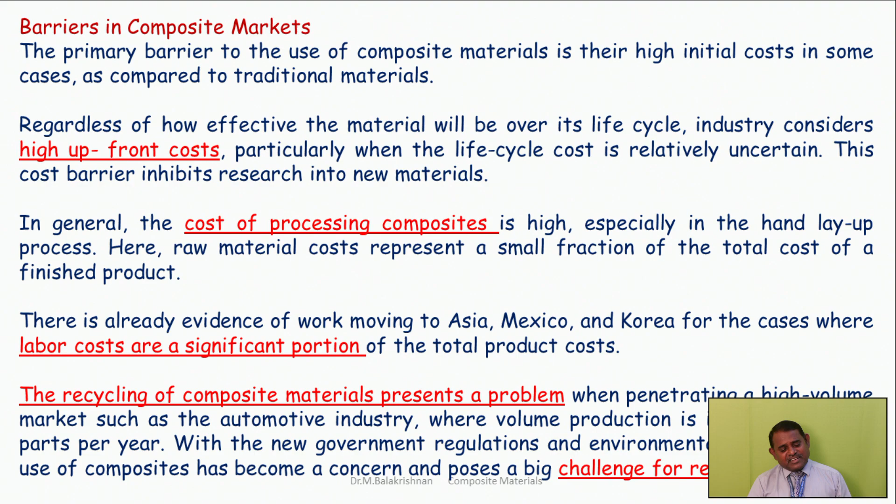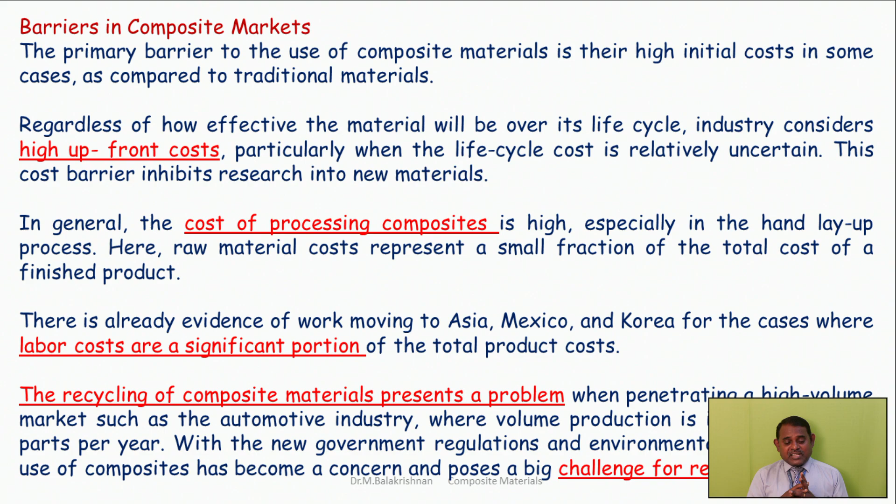Because of the maneuverability involved in manufacturing composites, manpower and manpower cost should also be considered when choosing a composite material as a candidate material for automobile applications. The biggest challenge of composite material is recycling, especially when penetrating high volume markets such as the automotive industry, where production volume is in millions of parts per year. With new government regulations and environmental awareness, the use of composites has become a concern and poses a big challenge for recycling. It is a different chapter to discuss.

So, in summary, we have discussed the basic categories of structural materials, what a composite material is, and why composites are important. We discussed the constituents of composite materials, like the matrix material, reinforcement material, and interfaces, and the functions of the matrix material, which carries the reinforcement, and the functions of the reinforcement material, which takes the load from the matrix material and can bear higher load compared to the matrix material. In today's application, we started from automobile applications, road transport, rail transport, and also discussed aerospace and biomedical applications.

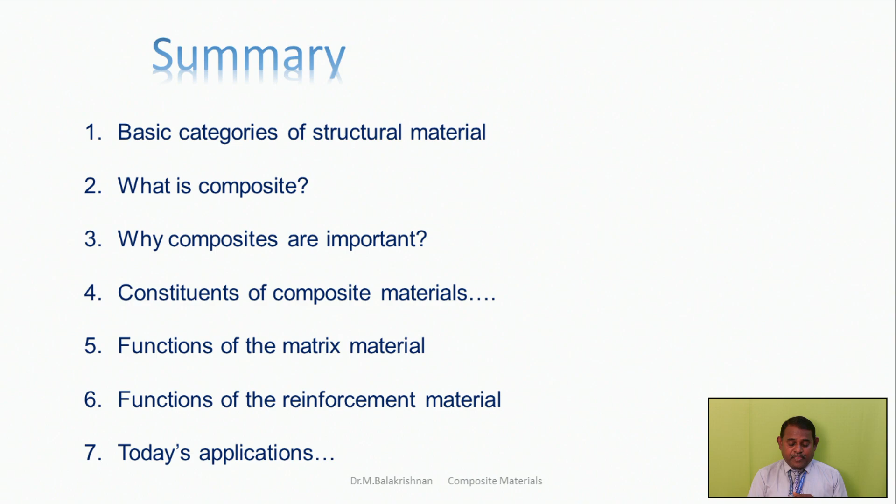Now, questions for thinking and discussing: What is the difference between composite material and monolithic metals and alloys? Yes, we have discussed this. Please rethink about the lecture material, discuss it yourselves, and come up with your solutions. What is meant by specific weight, and how is it advantageous in vehicle mobility? This is an important property which is claimed many times to be the chief advantage of composite materials. So we should understand what is meant by specific weight and how it is advantageous with vehicle mobility, and what is meant by specific strength, and how it is advantageous in vehicle mobility.